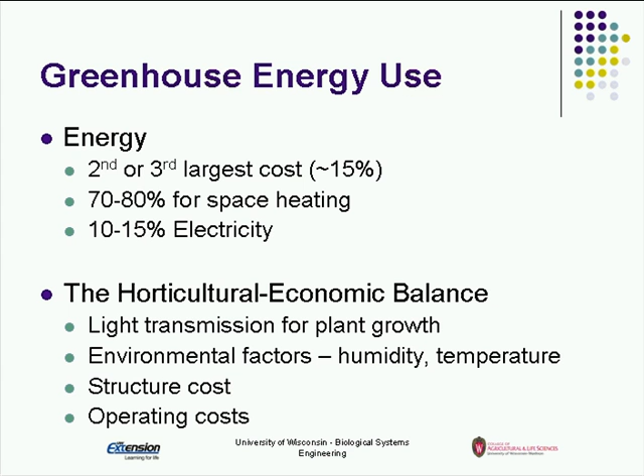When we look at energy conservation in a greenhouse, we're always balancing horticultural needs with economics, because we can do a very well-insulated building to keep the heat in, but without light, we don't have growth. So we're always balancing environmental factors for growth versus operating costs and sometimes structural costs.

Just a quick review of principles of heat loss. We have 4 main ways we lose heat out of a greenhouse. We have conduction loss, which is heat transfer through materials. There's a value each material can be assigned or is tested for, and it's listed as BTUs per hour per degree Fahrenheit per square foot.

What you may be more familiar with is R value, which is the inverse of that. When you look at the U values, you'll find they're around 1 or just a little less than 1. When we look at house construction, it would be a decimal point, so they invert it to make it a bigger number. But either will work, if you remember one's the inverse of the other.

We also have convection heat exchange within the greenhouse, which is the exchange of air moving in the greenhouse from a solid surface into the air, which is a fluid, and then back to another body inside the greenhouse.

The other is radiation heat loss, which is a transfer of heat between two bodies without direct contact. Sunlight is an example of that. The other type we're going to talk about is long wave, or infrared, radiation.

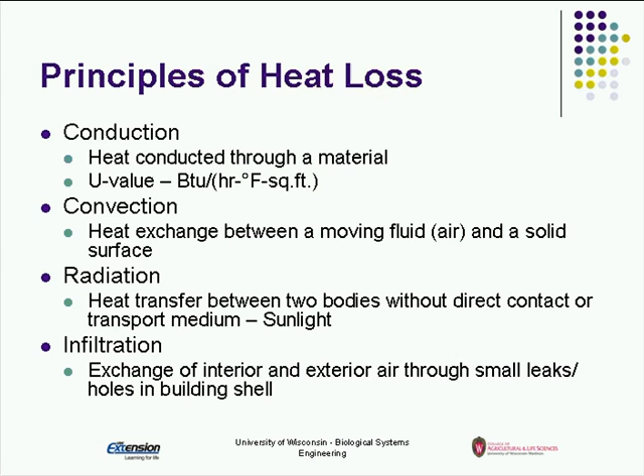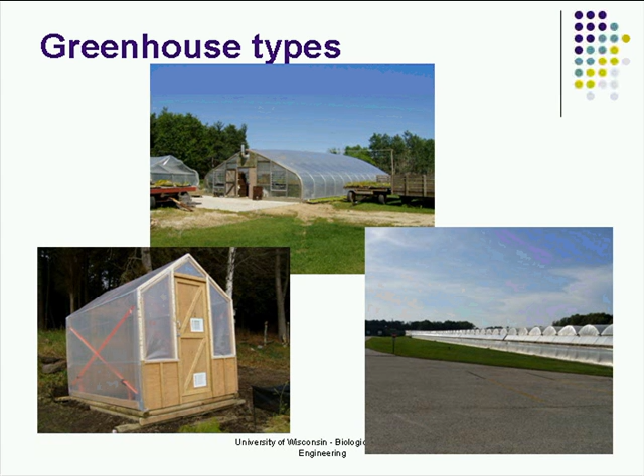So those are the main principles. It doesn't matter what type of greenhouse, whether you have a hobby greenhouse, a standalone, or a large span greenhouse, these principles work on each one.

Now, the first thing I want to talk about is structural efficiency, and basically this has to do with the amount of heat loss per surface area. When we look at a gutter-connected greenhouse, we have a lower ratio of heat loss area to floor area than we would with a standalone greenhouse. We basically have more surface area on a standalone greenhouse for the area covered, so we end up having more heat loss.

The question here is, what shape would have the lowest heat loss per floor area? It turns out to be a sphere. However, making a greenhouse in a sphere shape doesn't work very well, so we tend to use a square or rectangle. A square is going to have the least amount of surface area per floor area covered.

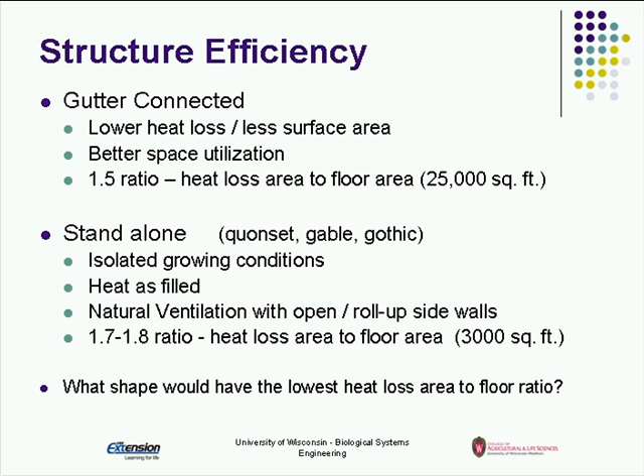So let's put some numbers on this. I chose a gutter-connected greenhouse with double IR poly, which is the best you can do in a poly, about a half acre of greenhouse with a standard power vent heater, just to give you an idea. I've got 8 standalone greenhouses versus a gutter-connected greenhouse, and you can see from the energy savings on the slide, I get about an 18% energy saving. Depending on what you're paying for LP gas, that could be $3,000 or $4,000 in energy.

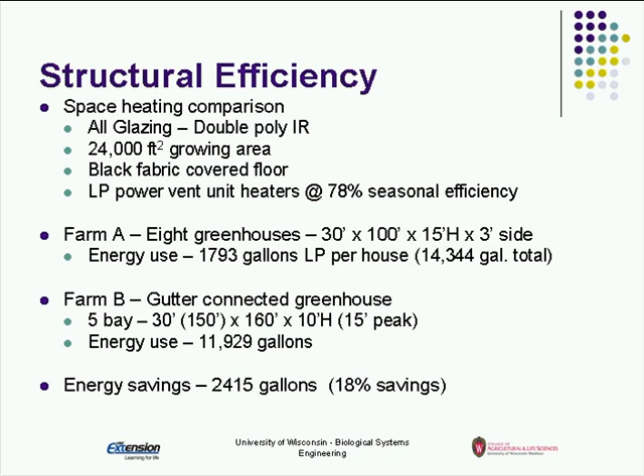You'll notice in here, my gutter-connected greenhouse, I made it almost square. So I tried to optimize this to show you what that effect would be.

The other thing when we're putting up greenhouses is orientation. The general recommendation is a single span should be east-west, and that's basically to maximize sunlight. When we have the wintertime sun, we're trying to maximize exposure. If we have it the long way, we're going to get the most amount of sun exposure into that greenhouse, so we pick up light for plant growth and heat. For gutter-connected greenhouses, or multiple bay greenhouses, the general recommendation is north-south.

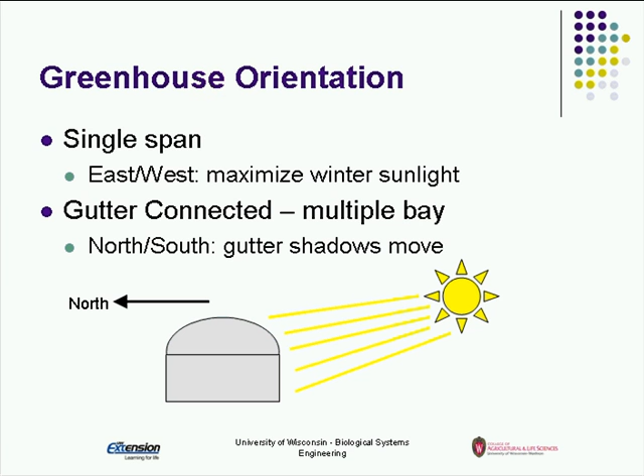This is because the gutters, which are about 12 inches wide or so, are going to cast a shadow in the greenhouse. If we have them east-west, that shadow, because the sun stays at about the same level in the sky during a winter day, will cast a shadow that basically won't move. But if we put that greenhouse north-south, then that shadow moves throughout the day, so we don't have a spot where we have less growth.

Glazing materials. We've got to cover our greenhouse with something to provide sunlight to come in, but yet maintain heat. They're basically broken down into two classes: one would be a single pane, and the other would be a double type material. So I picked the two extremes here for my example: one is glass, and the other is a double polyethylene film.

Anything with single pane is going to have a heat loss of about 1.1 to 1.2 BTUs per square foot per hour per degree Fahrenheit. Glass is basically the gold standard for greenhouses, mainly because it has high light transmittance, and percent of light is percent of growth. The disadvantage of glass is the weight of it and the cost for holding it up. It does have a very long life, which is an advantage, unless you get a hailstorm. If you get large hail, that could cause a problem. But it is basically the gold standard.

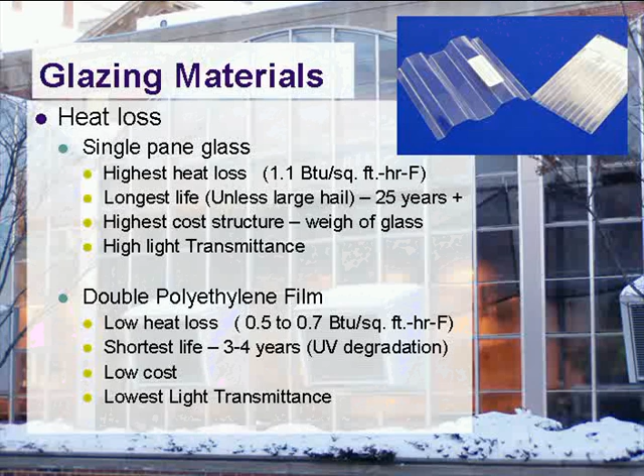When we look at polyethylene film, it's going to have the shortest life, although it's going to have a reasonable heat loss. Standard film is going to be about 0.7. If we have the IR rated, it's going to be down around 0.5. It's low cost, but it has lower light transmittance. My next slide will show you a table with the different types of materials used on greenhouses. We've got glass...

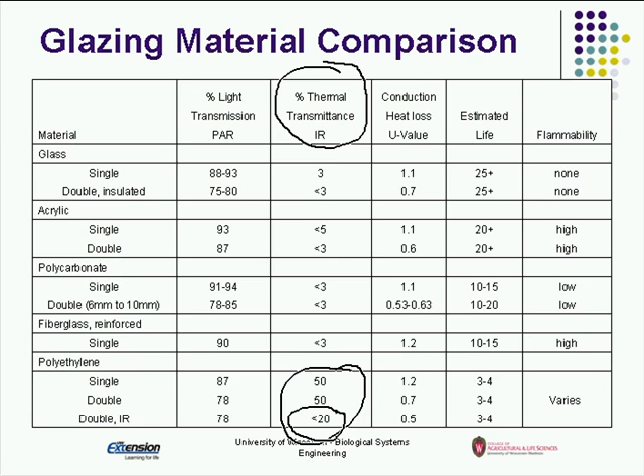So, main infrared pathways: we've got the sun on the outside, it comes through the glazing, warms the objects, and then the long dashed lines are basically the long wave radiation radiating back into the greenhouse. Glass or polycarbonate will reflect that. We get to the polyethylene films—a lot of that long wave radiation will go right through the greenhouse.

With the exception, if I've got condensation—condensation will block long wave radiation, but it also blocks light coming in. It can reduce the light level coming in by 15-25%. So condensation at night's not a problem, but condensation during the day is. We'll talk about that more in a little bit.

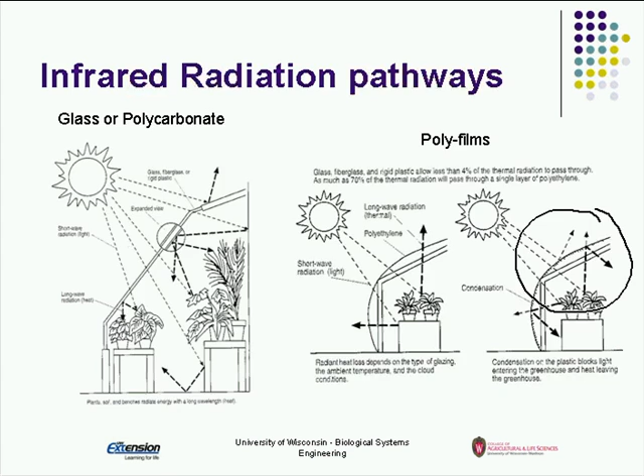So I think I covered most of this. Polyethylene films are the worst. Most companies make one or two products that have an additive to block the long wave radiation leaving the greenhouse, and they call it a thermal or an IR type film. This can reduce heat loss, long wave radiation heat loss, by about 15 to 20%. They cost about 1.5 to 2 pennies a square foot.

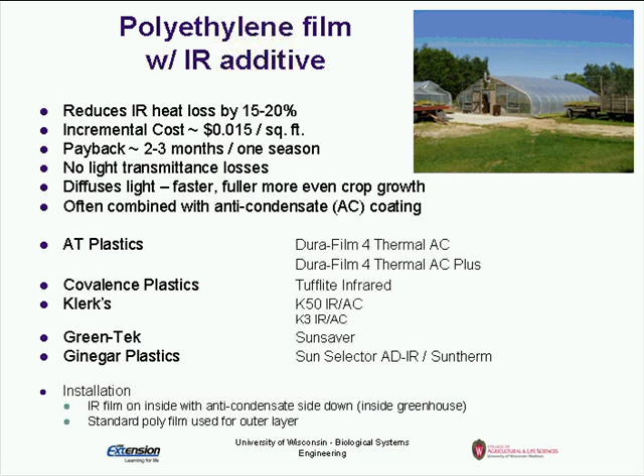And these are often combined with an anti-condensate coating or something that reduces the surface tension so that condensate will run off the greenhouse glazing. One thing to point out is the IR film should be on the inside—it should be the inside film, mainly because it has the anti-condensate additive on it, so it has an up and a down side. This is important, because I had a grower that had a company come in and put it on the outside, so it didn't help them.

Solar gain, I've already mentioned this—basically, percent light is percent growth. So when we look at different materials, as we go to a double wall material, we're going to gain in energy conservation, but we're going to lose in the fact that we have less light coming into the greenhouse.

Now, we have auditors here in Wisconsin that are in the field, and they've realized that there's a triple-paned polycarbonate, and they were starting to recommend it. Well, one of the issues with that is you're going to lose another 5% in light level. During February and early March, we probably can't afford to lose that, because we're going to actually extend the growing season if we lose that light level.

So this is that horticultural economic balance that we talk about. And one of the points there is there's a better option, and that would be thermal curtains, which we'll talk about later.

Condensate: if you don't have anti-condensate films, you can buy a material to spray onto the film to reduce condensate buildup on the polycarbonate. We don't necessarily have a dust problem here, but in some parts of the country they do, and there are anti-dust additives to keep it off the outside of the greenhouse.

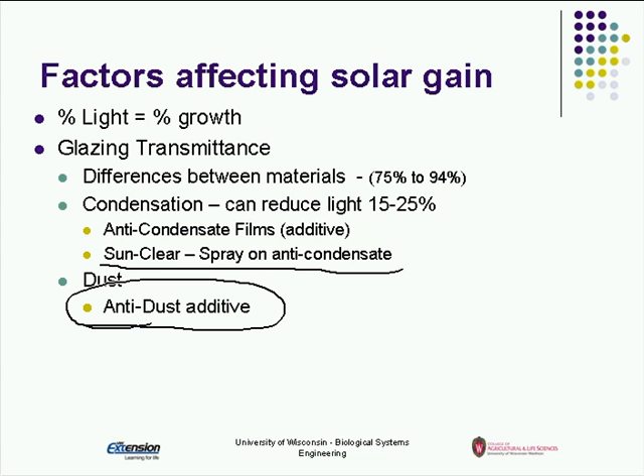One thing I'll point out on a double poly greenhouse is we inflate these with a little blower. The typical setup has them on the inside of the greenhouse, pulling in inside air to expand those poly films. One problem with that is that's the highest humidity air, and when it contacts the cold air next to the outside film, it condenses and restricts our light level.

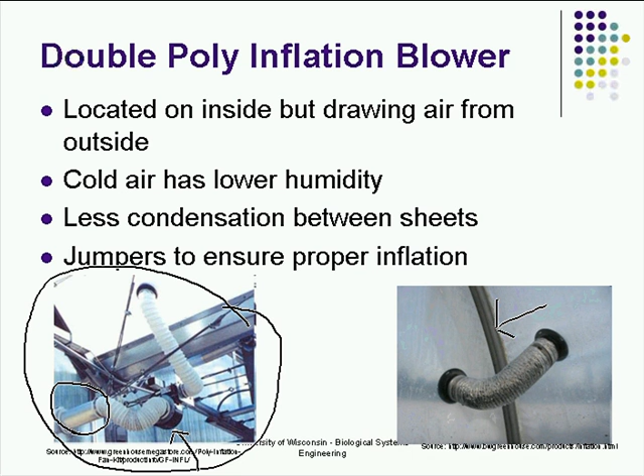A better way is what's pictured in this first picture: have the inlet here, and the blower here, so we're pulling outside air in to inflate this. That's lower humidity air, so you have fewer condensation problems. The other thing is to make sure our panels are inflated properly. Sometimes when they come across a corner, that acts as a restriction, so putting a jumper in, like pictured here on the right, ensures you have adequate pressure to inflate that area fully. So that can be an issue.

Glazing materials versus infiltration loss. Infiltration loss can vary widely on greenhouses, and a lot of this has to do with maintenance. We get leaks through louvers, doors, holes and laps, and actually underneath sill boards is a big one as well. But it's also affected by the type of glazing material and the number of joints we have. A polyethylene film has very few joints, so it actually has the lowest air exchanges per hour, versus glass which is going to be much higher.

Now, new glass, you've got brand new joints, it's going to be good, but as it ages, we can get higher infiltration losses.

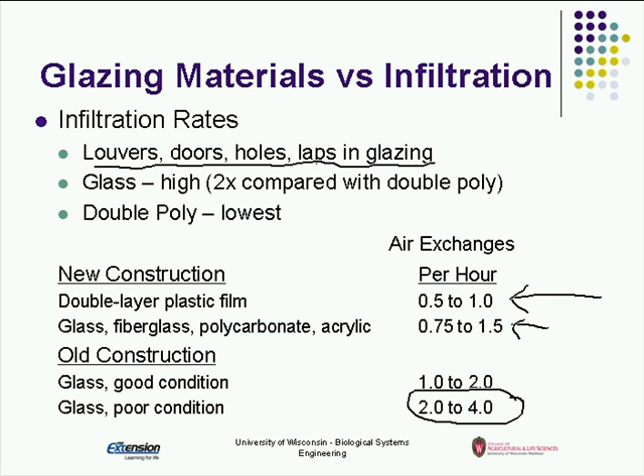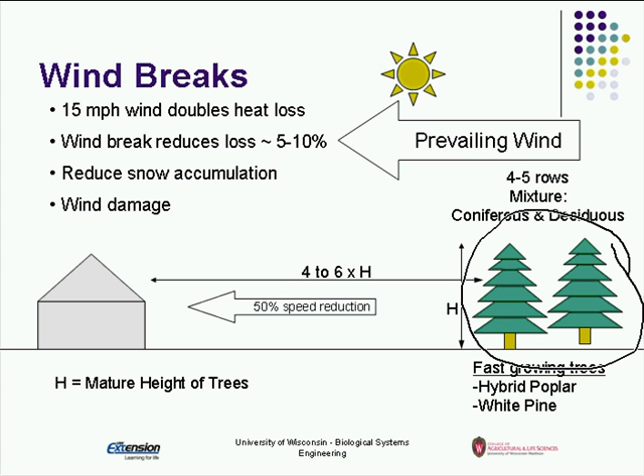One thing that can help reduce infiltration rate is windbreaks, and this is a long-term thing, depending on how much area you have. If we can put a row of trees upwind of our greenhouse, we can reduce the pressure on the greenhouse somewhere between 5 and 10% during windy periods.

Doors: if you have a door coming into a greenhouse and you just have dirt on it, putting a wooden sill there maintains the gap. Now, we do need some air in a greenhouse for heaters, depending on the type of heater, but we'd rather have those as planned inlets versus unplanned.

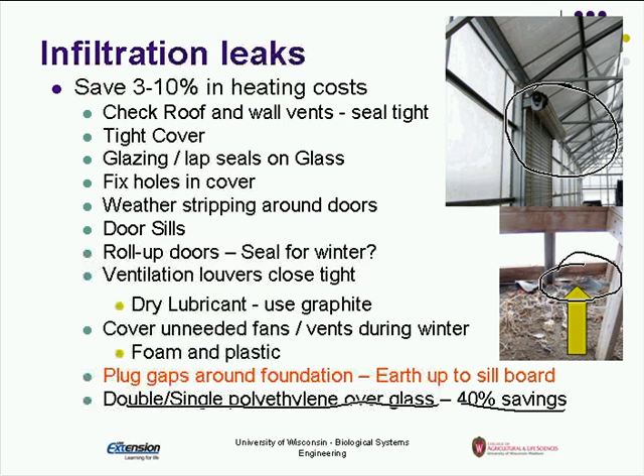The other thing is, if we have a glass greenhouse, one of the things we can do is put a piece of polyethylene over the glass for the winter. We have a big savings here. If we reduce our infiltration rates, we will reduce the light transmission through there, so it's going to go from about 90 down to about 78 or 80 by putting a piece of poly over it. But here's a case where the energy savings is probably worth it to do that.

Conduction heat loss: basically we have it through the glazing materials, but we also can have it through the walls. If we're growing plants on benches, we really don't need to have glazing from the bench down, because under the bench we don't need light. So one option is to insulate the walls up to the height of the plant. This can be a simple 2x4 stud wall, preferably with foam, because foam won't absorb moisture as well.

If you already have a greenhouse, you can take a foam board and lay it up against the wall, but it has to be sealed tight to the wall so air can't get behind it.

On new greenhouses, putting a piece of foam board along the foundation will reduce heat loss, especially if we're growing in the ground. For new construction, when we do the math on the heat loss, it doesn't pan out for existing construction because of the cost of installation.

If you're doing new construction, before you start, you run down with a trencher, make your trench, and drop your foam board in it, and you're ready to go. It's quick and fast. If you've got an existing greenhouse, most of it's probably going to end up being by hand, so it's expensive. The warning here is that foam board is flammable, so we need to cover it.

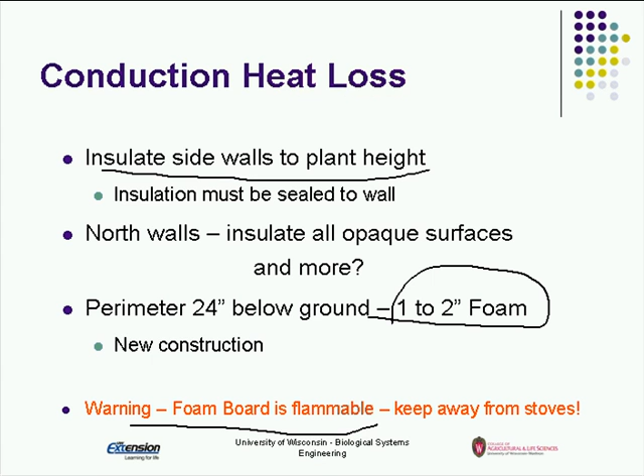Next we're going to talk about heaters. There's quite a bit we can do with heaters as far as saving energy and reducing our costs. Unit heaters are one of the most popular because they're low cost, easy to install, can be easily staged, and they're very reliable. So in almost every greenhouse you'll see some type of unit heater someplace.

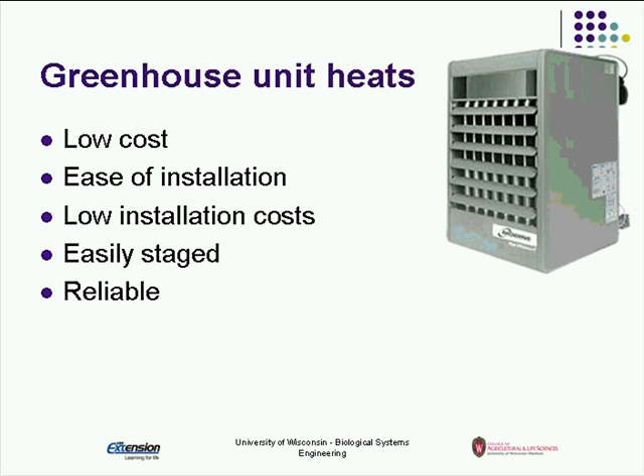When I first started looking at this, there's a number of different types of unit heaters, and there's very little dollar difference between some of these. Up in the upper right-hand corner, we have a gravity vent, which you'll see has a big pipe coming out of the back of the heater, and it basically comes out and goes out of the building.

That's a gravity vent. The next step up from that is a power vent, which is down here at the bottom, and it's got a little blower on the exhaust that meters the air out of or through the combustion. One of the things with those is when the burner isn't firing, that fan blocks atmospheric air from just freely going out of the heater.

The next one is a separated combustion power vent heater. Up on the top here, you can see the fan, but it also has a line coming in that brings fresh air in. For many greenhouses, if you're doing a lot of fogging, this is highly recommended because of the corrosive nature of some of the sprays we use in greenhouses.

One advantage of this is, especially if you're in a windy spot, this will affect the burner a lot less, but it also brings in outside air. These first two types use inside air to combust it, so we're heating the air and then using it to combust our gas. We're losing a slight bit of efficiency because of that.

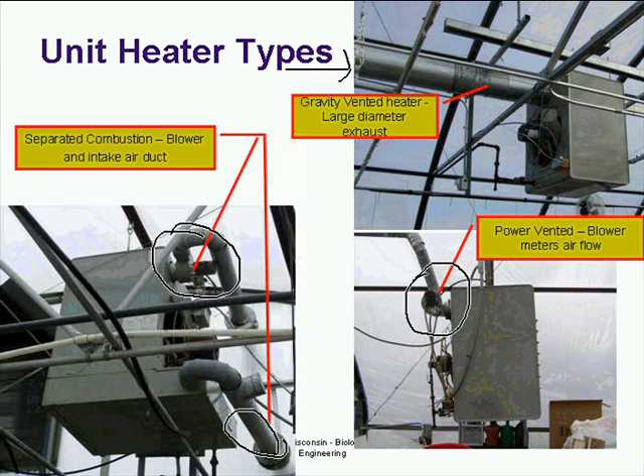One of the new things in the market is a high-efficiency condensing type unit heater. Condensing type heaters have been in residential heating systems for a number of years now, but the greenhouse industry has only had a few manufacturers making them. With these, you can see we've got a fresh air and an exhaust line, often PVC tube, with a drain on the bottom. Essentially this is a separated combustion heater with an extra heat exchanger that condenses some of the moisture out of the flue gas to get more heat out of it.

When we evaporate water, it takes 970 BTUs per pound of water to evaporate it. If we can pull some of that heat back out, that's heat into the greenhouse. So that's how this works.

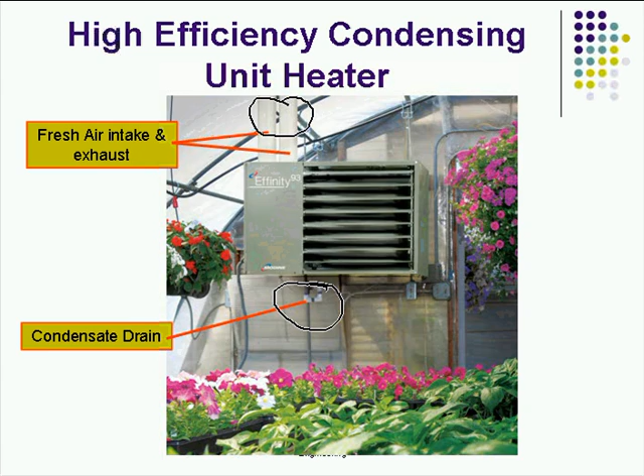When you look at the literature on some of these, what struck me is that this gravity vent and this power vent have the same efficiency, and there's roughly $100 difference between them. Now, the gravity vent is no longer sold because of the new energy standard passed in Congress. These gravity vents couldn't meet it, but there's a large installed base. When I started looking at these, there was a $100 difference, so I was trying to figure out what the difference is.

Why would you spend an extra $100 to get the same efficiency? Except that, if you got a power vent, you have more leeway as to where you put it. My next slide's going to show that a little bit.

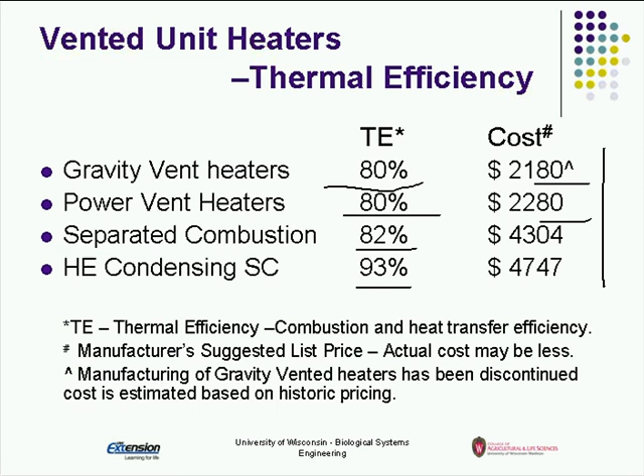Separated combustion is about 82% - actually the new ones are 80% now. Then we've got the high efficiency one, which is definitely another 13% higher. And then we've got associated costs with them.

I was trying to figure out why you'd want to spend more money or what the advantage is. One of the things the manufacturers don't do a very good job of is talking about seasonal efficiency. If I've got that gravity vent heater in, I've got air running through that heater whether it's firing or not, and you lose a lot through that just because it's running air through it all the time. That's the difference between the power vent and the gravity vent - that little fan blocks the natural buoyancy of air going out of the greenhouse.

So for $100, that's well worth the investment. And then the separated combustion is 80%. We're using outside air, so we gain the 2% over the power vent by bringing air in from the outside. And then we have the high efficiency unit.

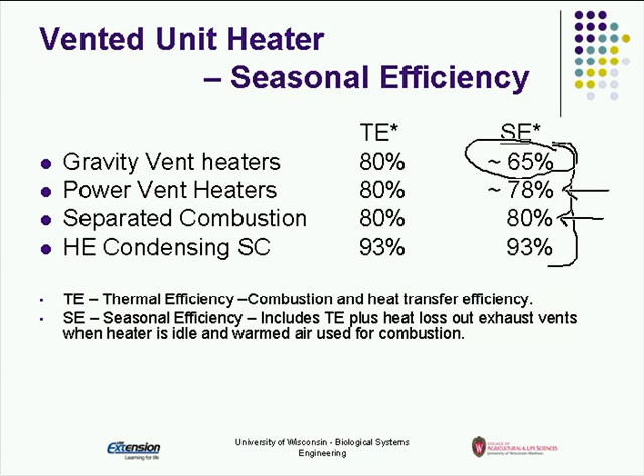So the question is, let's do a little case study here to show you what the difference is, because I've been in this business long enough that basically nothing happens - people won't invest in this unless it's economical.

So I got a 30 by 96 greenhouse here in Madison. One heater can supply the heat 90% of the time. Got a daytime of 68 versus 60 at night. I'm assuming $1.50 for propane, and a growing season of February to June.

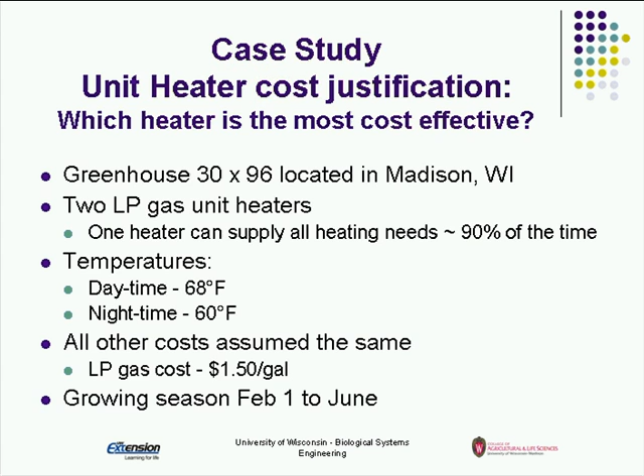When I look at that with my incremental costs, I've got two heaters. So I'm going to compare gravity vent as my base. I've got a power vent, separated combustion. I've got a high efficiency unit. And then I paired up a high efficiency unit with a power vent. I'll explain that in a minute.

So you can see in my energy savings, or my fuel savings, there's quite a savings here. Over the power vent, there's a 16% savings. Separated combustion is 19%. High efficiency jumps up another 11%.

One thing is that if I use a condensing unit with a power vent as my backup, or my second heater - so I run my high efficiency condensing unit as a primary heater and my power vent as a backup heater - I can gain almost the same efficiency as using two high efficiency units.

So when I look at the payback for these, and this is simple payback, nobody should ever have bought a gravity vent because it pays back in basically a month and a half. Separated combustion is the longest payback.

Even compared to the higher cost of a high efficiency condensing unit, when I pair the two of those I get a very nice payback, because I'm taking advantage of the high efficiency unit for 80 to 90% of my heating needs, and then that last 10% I'm using the power vent. I also have a backup heater by having two of them.

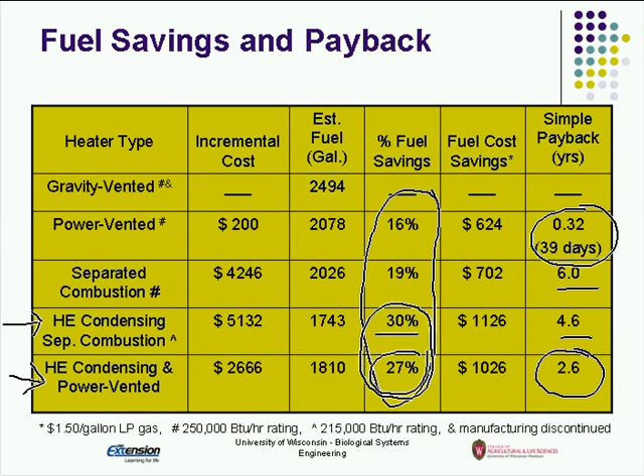Now, all's not lost. If you have a gravity vent heater, there are companies that make upgrade kits. Modine makes an upgrade kit, and you'd have to check on some of the other ones. They're a little more pricey than a $200 price difference, but they'll pay for themselves in a season or two - well worth the investment.

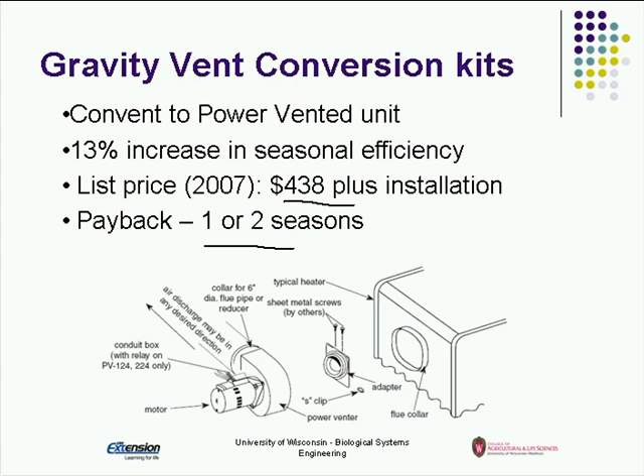And they just attach - the basic heater, there's no difference in it. Just by adding that fan on it, it helps meter the air and reduces the heat loss when the heater isn't running.

Now there are non-vented heaters out there that claim to be 100% efficiency or 99%, and 20% fuel savings over traditional heaters.

They work, people use them. The biggest challenge with these is that they're putting moisture in the air, which can cause problems with diseases.

Now they're also putting CO2 in the air, which they tout as well, plants need CO2, but 80% of our heating is at night, and plants don't use CO2 at night. So yes, it can be used as a CO2 generator, but it's not generating most of the CO2 when the plants are using it. So one of the other issues here is it's putting the products of combustion into the greenhouse.

Now these are very high efficiency and low combustion rates of carbon monoxide and all the other stuff. But they do have to have, either a separate inlet to pull outside air in, or they have to be interlocked with a vent so that the vent opens when the heater runs. Well, as soon as you do that, you lose some efficiency because now you're bringing cold air into the greenhouse that you have to reheat.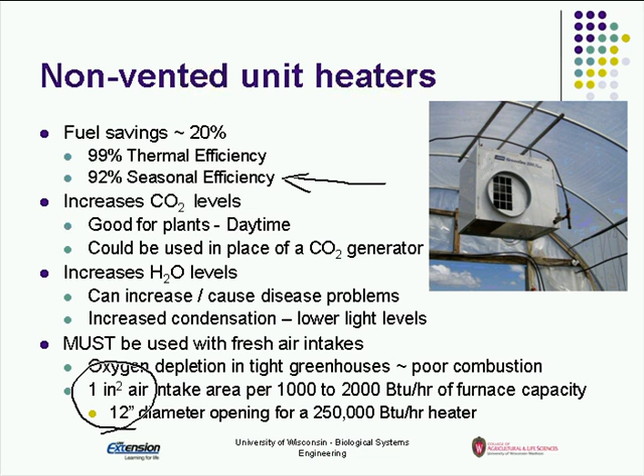And on the bottom here, it has suggested area for how big that vent should be. So one of the things we might want to look at is we have a high efficiency heater that runs at night, and we pair it with one of these non-vented heaters to run during the day. So we can switch which heater is the primary heater. And if we have a centralized control system, we can do that.

Now I've occasionally worked with Amish or people that have non-electric greenhouses, and there are small heaters that can be used for there, both vented and non-vented. If you have a non-vented, you still have to have an air intake, just like the non-vented one in the previous slide.

And they do make set-back thermostats. They're usually battery operated. So if you've got a little hobby greenhouse or you're working with Amish, these are a possibility. Now, they're relatively low BTU per hour capacity, so you're going to need a number of them. If you don't have electric to have fans in it and you have a large greenhouse, you're going to have problems with heat distribution. So you may need a number of these anyway in the greenhouse, so you're going to want to spread them through the greenhouse.

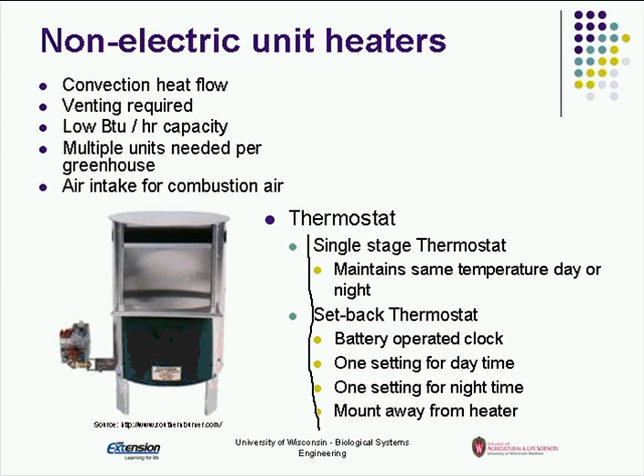But they're going to be about 80% efficiency, depending on how much air I bring in.

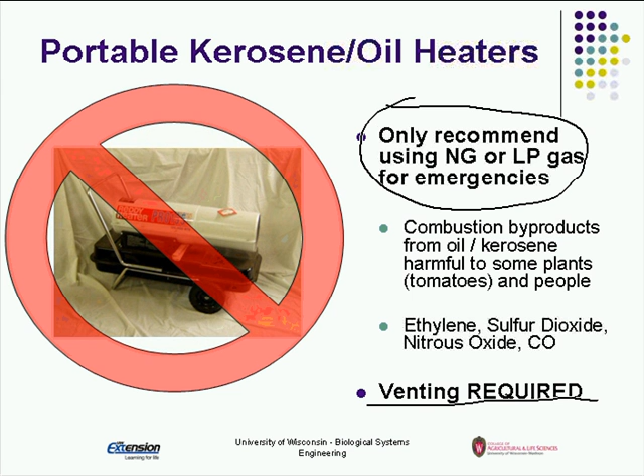Now, often I've seen where people in emergency cases or hobbyists try to use a portable type heater. Kerosene or oil are not recommended because the products of combustion of these contain ethylene, which will harm many plants, especially plants like tomatoes. They also have sulfur dioxide and nitrous oxide. These are meant to be in an area that's well ventilated. If you need to use something, use a natural gas or an LP type heater as backup, because these heaters and all these heaters are going to require venting. If you starve a heater for oxygen, you'll get incomplete combustion, regardless of the type of heater.

When we start to talk about heating in a greenhouse, often we've got a unit heater and it's kind of just blowing in the air. Sometimes they're mounted up in the peak. Well, the plants aren't growing in the peak. They're growing down on the floor on a bench. So anytime we can lower the heat and get it below or at the level of the plant, we can save energy because we can lower the overall temperature in that greenhouse. We make this little micro environment.

Anytime, as I said, we make this little micro environment at the plant level. So it can be in floor. It doesn't have to be a concrete floor. You could bury the hydronic tubes in the floor and grow on the floor. You could do it under bench, either forced air or hydronic. Hydronic is hot water. And studies have shown, this was a study in Louisiana which doesn't have a lot of heating, they found a 7% increase in the yields of tomatoes.

But the same thing can occur in floral plants, that they grow faster. Now, when you do have bench heating, you tend to have more watering because it dries the pots out faster. Or you may have to have a media that holds the water a little better, holds a little more water, because it will dry out.

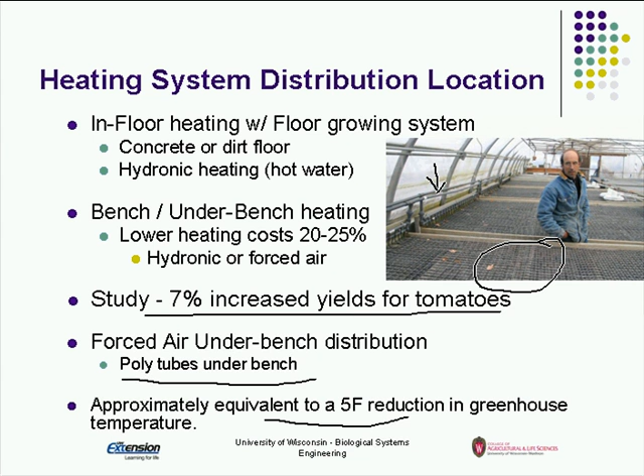So you're still going to have a unit heater to heat the air. On a night like we're going to have in the next couple of nights, where it's down around 0 at night, in-floor heating, especially if it's in concrete, typically can't keep up. An under-bench heater system will do a much better job, depending on the surface area you have available.

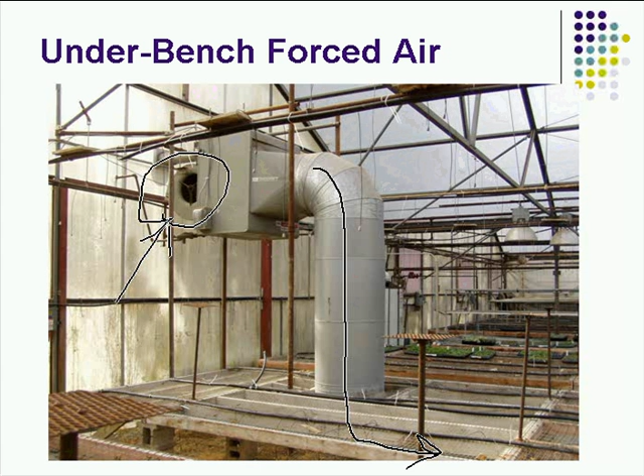Here's a picture of a unit heater set up to blow under the bench. This comes down and into a polytube under the bench that runs the length of the bench. Now, one thing I'll point out is unit heaters can be propeller fans, or this one here has a blower. When you go into a polytube, it has a higher static pressure and will require a fan that can maintain higher static pressure in order to get that air down through the whole polytube and inflate it.

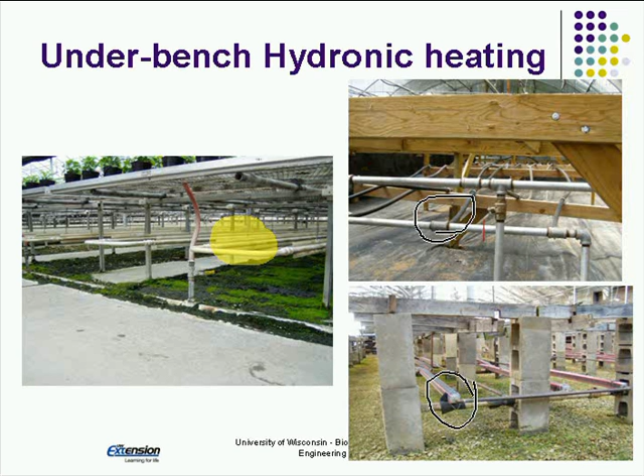Here's some examples of both homemade and commercial under-bench heating. The one on the left is a commercial fin tube. On the right here, this was an Amish or Mennonite setup - I think this was hooked up to a wood boiler, they just had some tubes in there. Here's somebody that got some old radiator fin tubes that they've just put on blocks under the bench. So it can be done in a number of different ways to get that under-bench heating, besides the mat that I showed you earlier. And there's some commercial mats available, and there's one that'll actually do watering and provide heat.

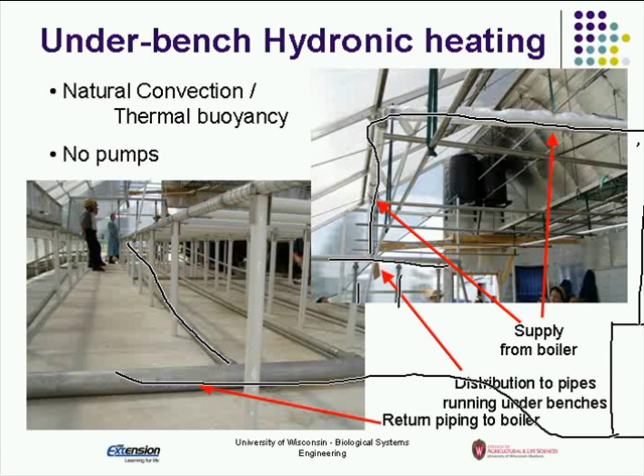Maintenance on systems. When we look at heater maintenance, especially if we're using boilers, there's significant savings we can make just in maintenance costs. One is to insulate pipes and ducts in head houses where we don't necessarily need the heat.

Clean air heat exchangers - even on the unit heater, blow off the heat exchanger surface area with compressed air. Some motors and fans may require some lubrication. And if we have a boiler, we typically need to open those up once a year and clean out the fire tubes, basically using a wire brush that you run down the tube to get rid of the soot, because the soot acts as an insulator and reduces the heat transfer rate.

If we have a steam system, steam traps can leak and increase our heating demand, so maintaining those is important. And for any kind of heater, especially oil burners, check the nozzle, the fuel filter, and the pressure we're operating at. Same thing with LP gas - make sure the pressure is correct so we're getting a good flame. Thermostats should be checked on an annual basis to make sure they're accurate. Depending on how far out of repair a system is, there could be up to a 20% savings just by doing the maintenance.

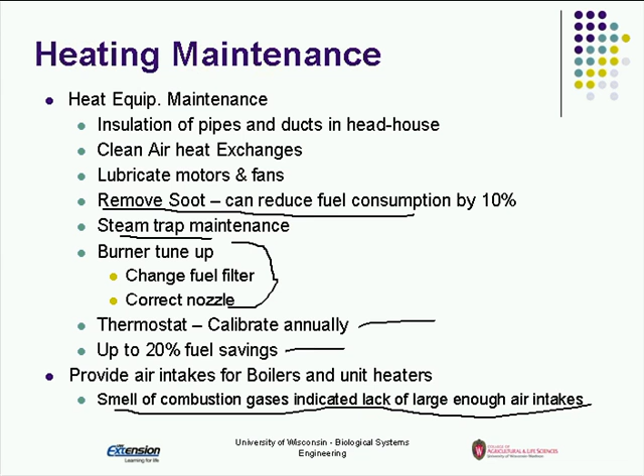Now, one thing I'll point out here is I talked about air inlets before. If I walk into a greenhouse and I can smell the products of combustion - and it's going to happen on a night like tonight or tomorrow night, where it's very cold, in Wisconsin we're supposed to be down around 0 or a little below - all the heaters are going to be running almost maxed out. If I walk into the greenhouse and can smell the products of combustion, that means I don't have enough air inlets for that heater. So that's an indication that I need to provide more air inlets. I can make those so they don't open until the heater comes on, and I can actually duct them right into where the heater is, but that's an indication.

On a high-efficiency basis, there are high-efficiency boiler systems out there. This pictures a couple of them - they're 90% plus efficient, and these can be tied in, if you're doing under-bench heating, to provide your under-bench heating. It also could be used with an air exchanger to provide your backup heat when the under-bench or in-floor heating can't keep up. So they're condensing boilers, up to 98% efficient.

If you've got an old boiler, one of the things we've done here in Wisconsin with our energy conservation program is add on to an old boiler. We set up these new high-efficiency heaters as the primary heater, so when the system first calls for heat, those come on first. If it can't keep up, say my set point is 60 and it cools to 55, then the old boiler kicks in to maintain temperature.

With a good control system, you can be more accurate, with less than a 5 degree difference—maybe 2 or 3 degrees. The point is, with these high-efficiency boilers, you might size them for about 80% of your heating needs versus 100%, which reduces upfront costs while still giving considerable savings.

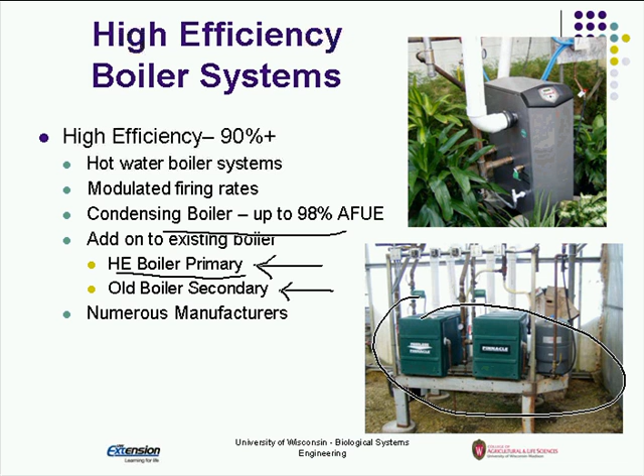Infrared heating is also a possibility in greenhouses, although it can burn the leaves. Basically, infrared heating heats the objects, not the air—it works like the sun. We have to be careful because it can burn leaves. There are also issues with heat distribution along these systems; if you just buy any old one, they'll be hot near the flame end and cool as you get down the line, so they may not provide very uniform heating.

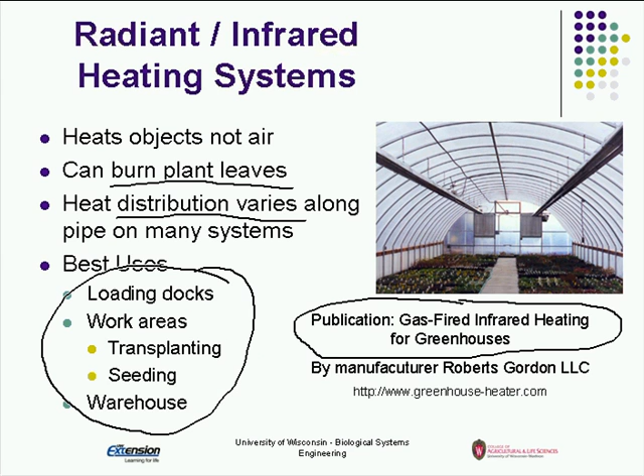Let's go to the next one, environmental controls. One issue is we've got a lot of systems in our greenhouses—heaters, fans, louvers, irrigation, CO2, lighting, etc.—and we want to make sure these systems aren't competing. If we have individual thermostats, we could end up with the fans on when the louvers aren't open, or the CO2 generator on when the fans are running, things like that.

So we're not necessarily getting our full bang for the buck, because they all have different thermostats that might not be quite as accurate. One advantage of using a system like GrowMaster, or a central controller, is they use one thermostat or temperature sensor and control everything from that. They can also be tied to a computer to anticipate wind or weather changes.

If the wind comes up, it might shut the vents. If you get shading, it might shut off the fans before it actually gets as cool as the fan setting is.

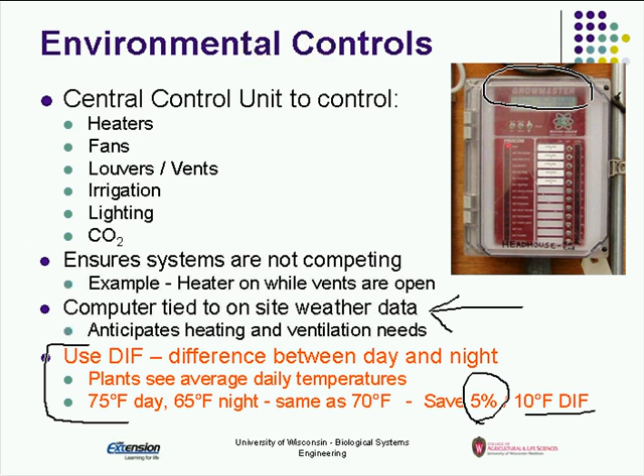Eric Runkle's going to talk about diff—how we can use day-night temperature differential to save energy. If we reduce our temperature by 10 degrees, we can save 5% on energy costs, and that's a production management issue. Basically, plants look at the average daily temperature, not the max and min, within reason. So a 75 day and 65 night is the same to a plant as 70 all the time, and we can use that to our advantage.

Space efficiency—most growers actually do a great job of it, but if we look at a traditional long bench, only about 59% of that is growing area. A peninsular bench gets 69%, versus 81% for movable benches.

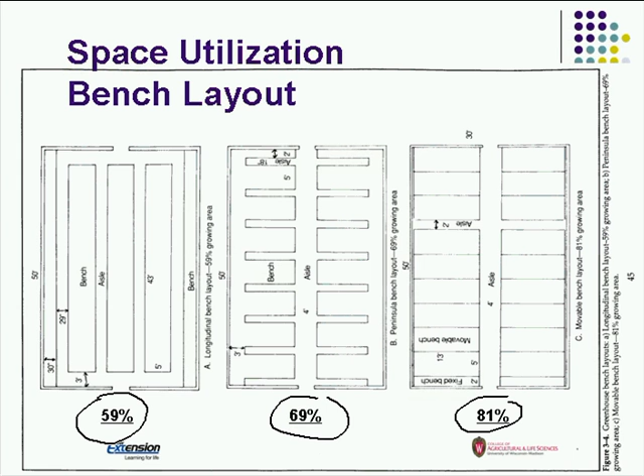Movable benches aren't great for retail space, but one thing we could do is put these on rolling carts. When it comes to retail season, we roll some of these carts out and rearrange them in a peninsular-type arrangement, so we get more out of the greenhouse and more out of the heat we put into it.

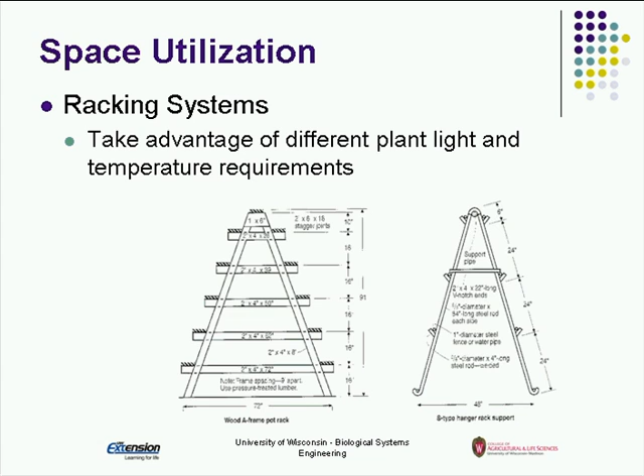The other option is racking systems we can use, or overhead pots. That's another example of trying to get more things into a greenhouse.

Some of these cable type systems actually have automatic waters - there's a water right under that red arrow. So it automatically waters the plants, which is a fairly labor-intensive chore otherwise. This system here has a pipe that runs back and forth in the greenhouse, so it can only cover half the greenhouse, versus the cable system where you've got plants running the whole greenhouse.

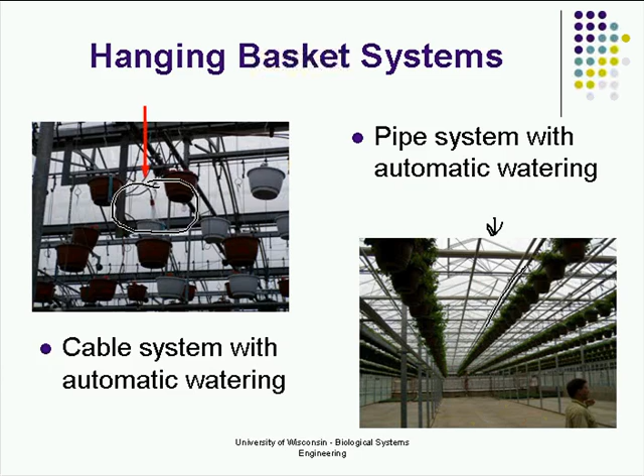Circulation fans can be important. One reason is mixing air to keep it from stratifying. If we don't have some air mixing, heat rises, so we'll have the warm air that we'd like down around the plants instead up in the peak of the greenhouse.

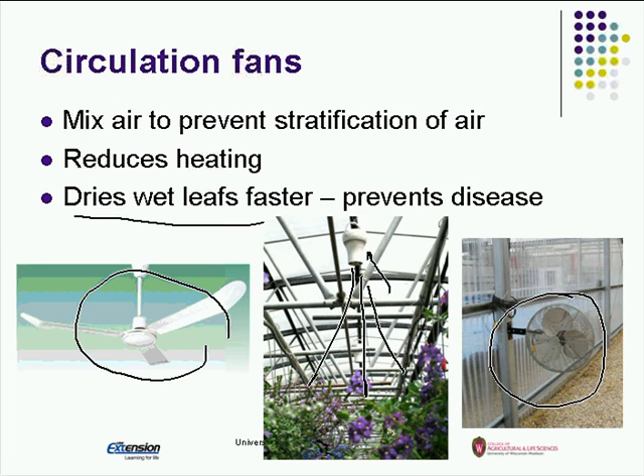For ventilation fans, exhaust fans on a greenhouse, they're going to be required in many cases, but there's a large difference in the efficiency of fans. The take-home message is you can't look at a fan and tell its efficiency. BESS Lab, part of the University of Illinois, tests fans and publishes results on their website, so you can look up a fan and get the test results. For the same size fan, there's a huge difference in efficiency.

It's well worth checking the data before buying a fan. Ideally, the larger the fan, the more efficient. Here in Wisconsin, we use a number of 20 or 21 CFM per watt at 0.05 inches of water pressure for fans to be considered high efficiency.

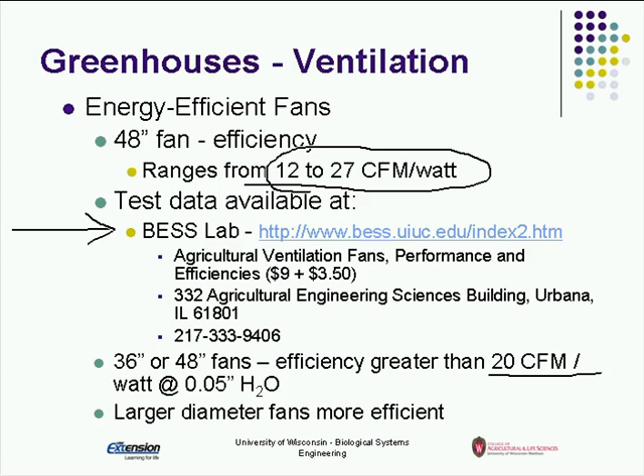Motor efficiency is another factor. If things run long hours, standard motors are not very efficient. Here's a standard 1/4 horsepower motor, which might be on a small fan. There are two companies that make high efficiency single-phase motors that are substantially more efficient. Often a lot of a fan's efficiency comes from having a higher efficiency motor. So if we have to replace a motor on a fan, we might want to go back to the original manufacturer rather than a third party, because a generic motor may not have the same efficiency.

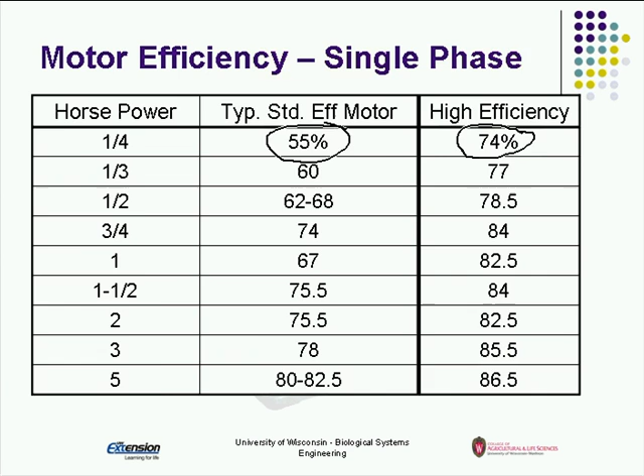With greenhouse ventilation maintenance, we've got fan maintenance and shutters. A shutter that won't open and close properly, especially a gravity one, can reduce airflow by 40%. Loose belts can reduce airflow by 30% before they start slipping and provide no air at all. One thing I recommend is buying fans with automatic tensioners, or retrofitting fans with automatic tensioners, to get rid of that chore.

A lot of these maintenance items get neglected because we get busy. Also, fans on a wall need weeds and shrubs trimmed away so there's free access for air to leave the building. Occasionally older motors require lubrication. Any fan or motor inside a greenhouse is considered a moist environment, and by electric code they should be totally enclosed motors - an important safety consideration.

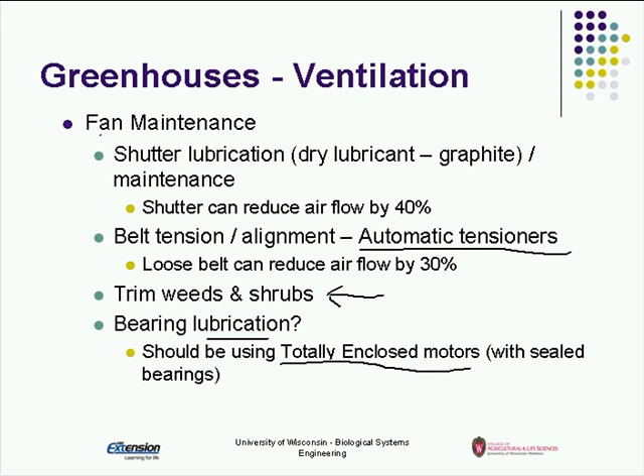From the ventilation side of greenhouses, we can use shade curtains, which can also double as thermal curtains if they're on the inside. So this can be something you pull over the outside or the inside. We can use evaporative cooling pads, misting, roll-up curtains, and open roof designs.

Here's a picture of an open roof design. This is about a half-acre greenhouse. It doesn't have any fans in it at all. There's enough thermal buoyancy to move that air out.

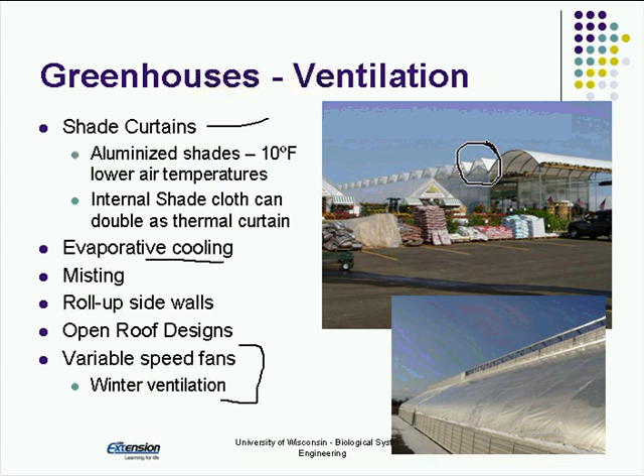The other thing we can do is use variable speed fans so that in wintertime ventilation, we can reduce that so we're not over-ventilating the greenhouse on those warm, sunny days in the winter.

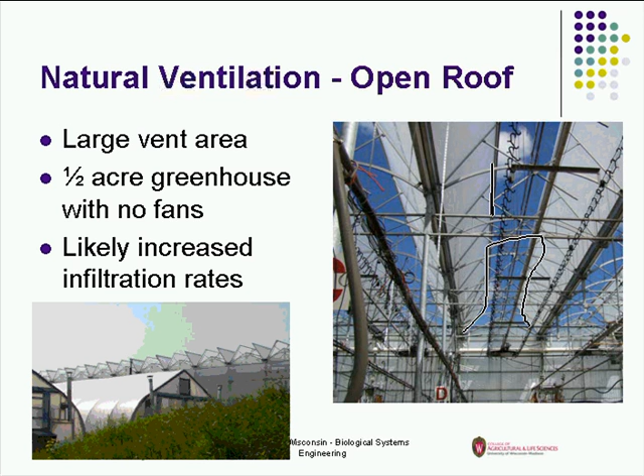Here's another picture of that naturally ventilated greenhouse. These roof panels have a large opening versus a gable vent or even a roof-type vent, so it increases ventilation rates substantially. One disadvantage is you've got a large amount of seal area for infiltration losses, so that's a concern. But from a ventilation standpoint, they're great.

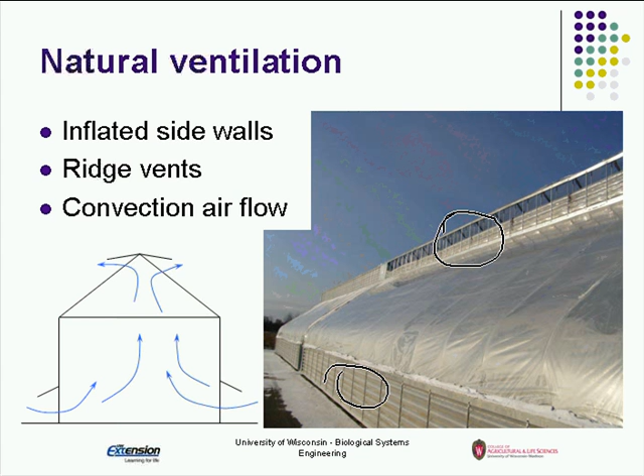We can also get naturally ventilated systems from having a peak vent and a side vent, or if you've got a low structure, you could have just two sidewall curtains to get natural ventilation through them as well.

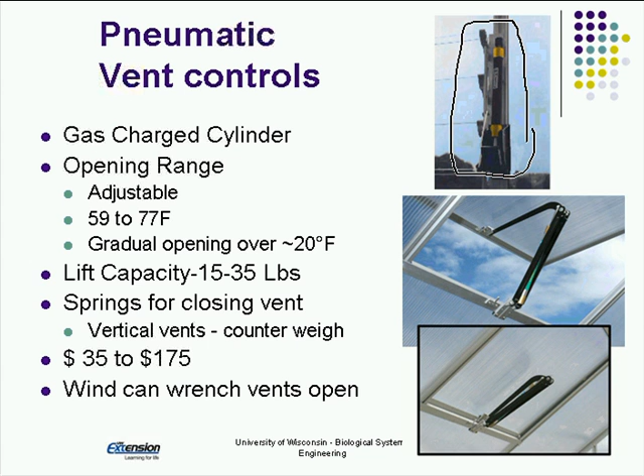Sidewall curtains, I talked about them briefly before. One of the things with sidewall curtains is they make great summertime ventilation, but they leak like a sieve in the wintertime. Sometimes there's single glazing, which increases our conduction heat loss, and if we don't seal them, they can have higher infiltration rates. So one of the recommendations I have is to put a wiggle wire type thing around the edge so that you can seal them up in the wintertime with something that you can quickly undo when the weather starts getting warmer in the spring to reduce the infiltration rates.

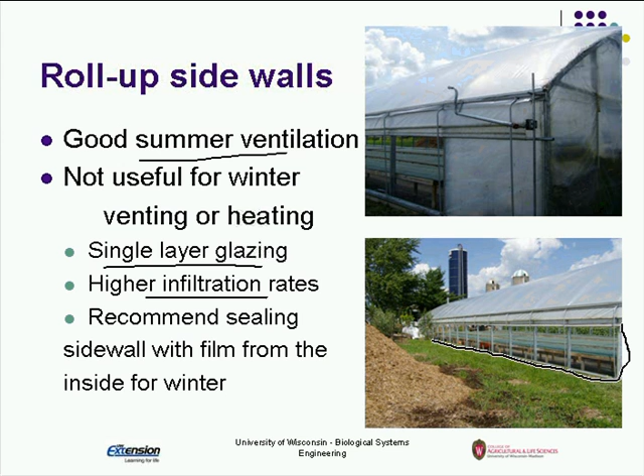Supplemental lighting, Eric Runkle is going to cover more on this. The one thing I will say is we can use lighting to get plants to market faster. If we know the daily light integral, we can measure that. So if we don't get enough sun, we add supplemental light and we can get that plant to market in a timely manner.

This kind of lighting is actually used in the hydroponic business. If you're doing hydroponic greens, you want to get that crop to market in 39 days, and in order to do that, I've got to have an ample amount of sunlight to do that.

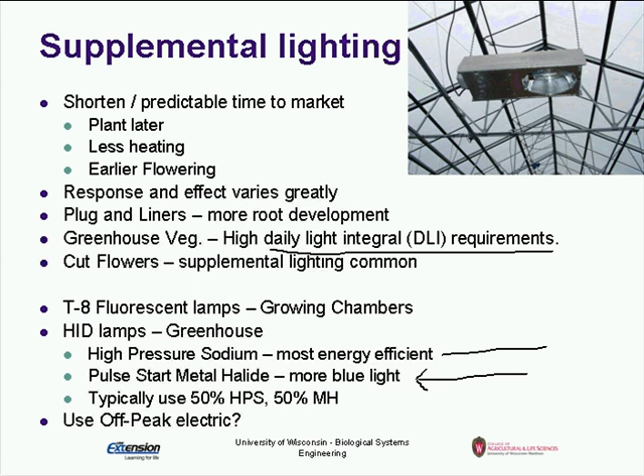One of the two types of lights we use in that case is high pressure sodium and metal halide. High pressure sodium is going to give us more of a red light, where the metal halide is going to give us more of a blue light. So depending on the stage, and Eric's going to talk more about that, we might use high pressure sodium all through the greenhouse or a mix, a 50-50 mix.

I got a couple of slides in here about solar greenhouses. I get calls and somebody says, I want a solar greenhouse. Well, greenhouses are solar. What they really want is to look at, can I do it without heating? And you can. We can use water, rock, stone, brick, whatever.

We can have thermal walls or underbench rock, or a foundation underneath the greenhouse where you can pipe the air down through to store heat. Cornell did a study back in the 70s, and they found with underbench rock, they could offset the heating about 25%.

The biggest thing people need to realize is you have to let the temperature vary. In order to get the heat out of something that's 70, you've got to drop the temperature. So you may have to go down to 55 or 50 to get a reasonable amount of heat out of that to maintain the greenhouse. So you've got to be able to allow the temperature to swing in the greenhouse, for one.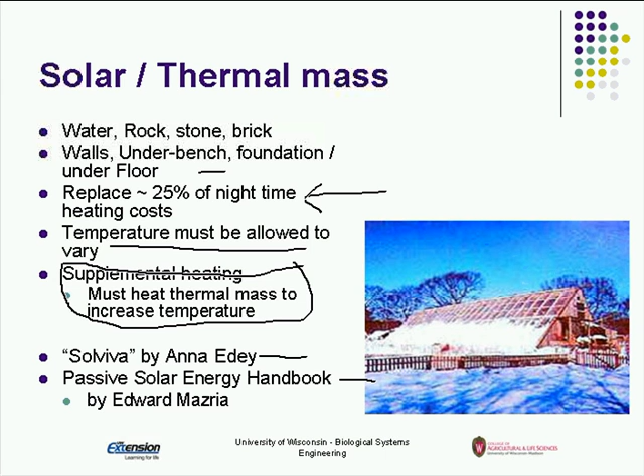The other issue is if I do any supplemental heating, I have to heat all that thermal mass up, so that's going to add to my heating costs to a point. So that's an issue. There are two references I put here that I think are reasonable references that you might find handy.

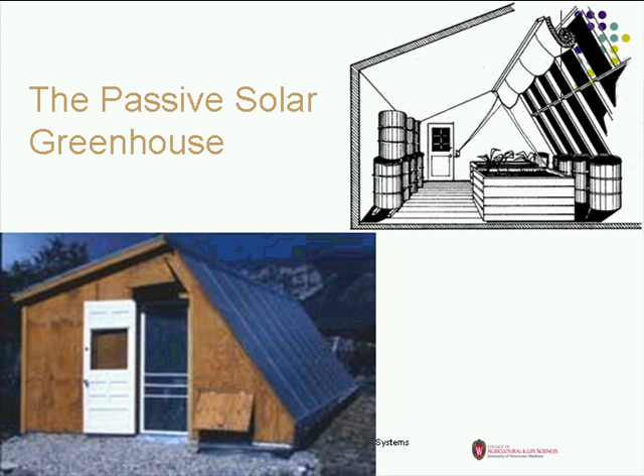Here's just how they work. Basically, here's a brace-type greenhouse with some thermal mass in it. We've got a curtain here, and we've got to insulate the front wall to reduce heat loss as much as possible. We've got insulated walls here, both the north roof and the north wall, and then the east and west vary depending on the type of greenhouse.

The object is, in the summertime, the heat coming in isn't going to hit those barrels to add to the thermal mass. During the winter, the sun's low in the sky and will hit that.

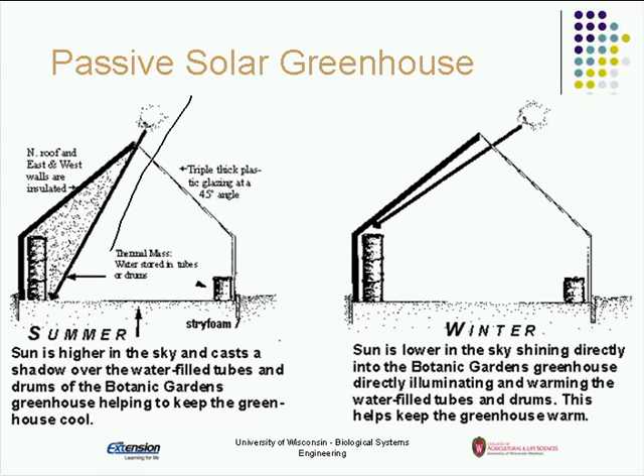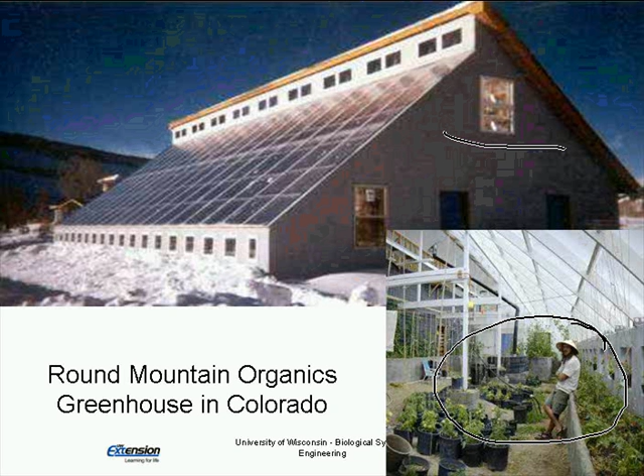They also do cold climates. Here's one in Colorado. I'd say their density of plants in here isn't very big, but this one actually appears to have a second story up here where they could possibly grow. They will all have some kind of thermal mass in them to provide heat during the night.

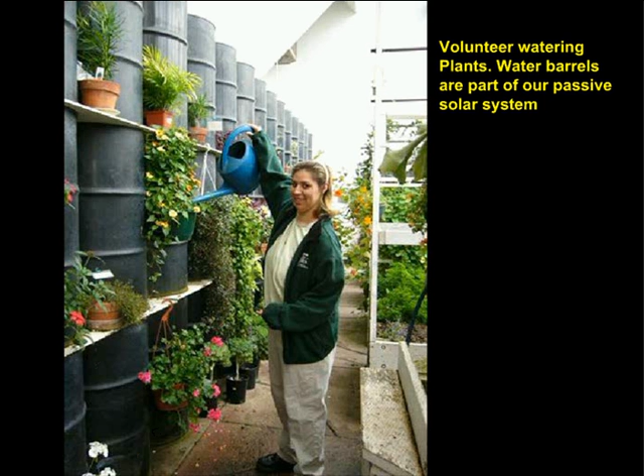They ask you for what you want for the walls, ceiling, etc., and it will calculate out the estimated heat loss, and then it will make some recommendations on the different types of things you can do to reduce the heat loss. Depending on which ones you select, it'll combine the energy savings from those.